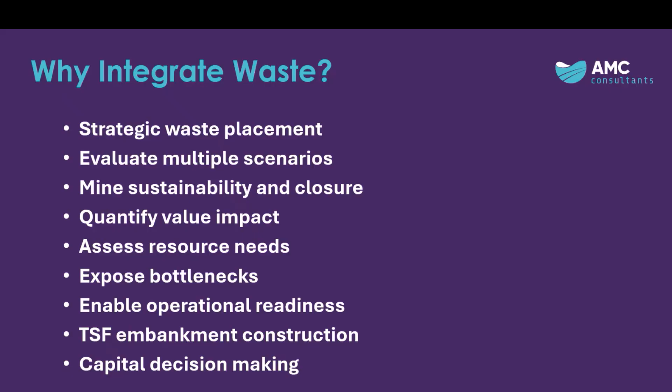Couple of terms I use: ARD, acid rock drainage; PAFs, potentially acid forming material; NAFs, non-acid forming material; and NAPP is the net acid production potential.

I'm not a geochemist, but we sort of utilize their information to integrate it. So it's important we sort of understand the terms that they're using, and we understand the data that they're providing us so we can integrate it.

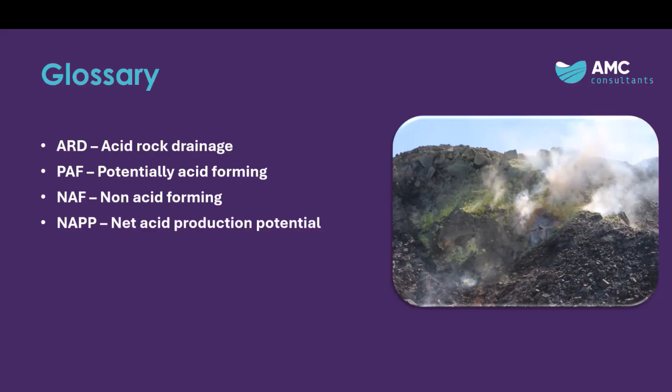So approaches. Like anything in mine planning, it depends. What level of study are you at - the concept? Are you at the DFS sort of stage? How much information do you have?

What's in your block model? Often you might not consider your waste dumps early in your mine life because you just don't have a lot of information. You haven't done your geochem, you haven't done your waste characterization, but you might have a bit of an inkling. You might have sulfur in your model, you might have a lithology model, or you might just be basing it on oxide and sulfides to get a rough idea.

Dump design complexity. Some operations need a very complex cover system for their waste dumps to encapsulate the nastier material, or it might be very simple. You might also be very early in your mine life. You don't really know what it is, but you understand you're probably going to need something to sit on top of it, or layer it, or create a base.

Does your site have stockpiling capacity? One operation we've worked with had zero stockpiling capacity for anything. So all the NAF that's needed needs to be mined as you're going over the operation. You can't just sit there and wait for later.

And modelling constraints. We talked a bit before about blending for grades, for throughputs. You can also apply your constraints to your waste dump, so that can be for the NAF we talked about before, or proportions of PAF and NAF as it's coming out by dump, by lift.

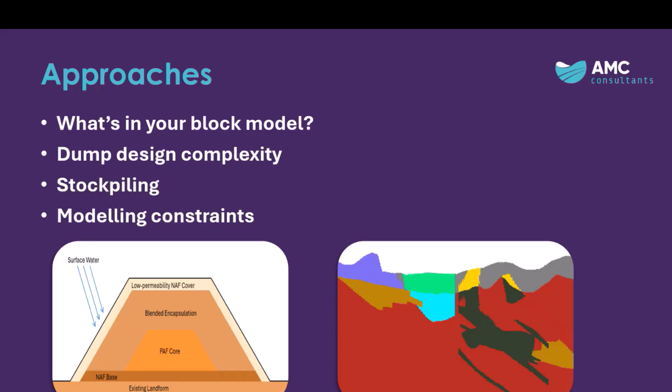So we'll just touch on a couple of case studies. The case studies go from more high level data to more detailed, sort of towards the end of your study period.

For this particular one here, just a very basic NAF-PAF definition based on the weathering profile - so oxide is NAF, the sulfides are PAF. We had a few different ex-pits, a few in-pits, so you can be trading off those. The ex-pits had a sort of concept cover system, and the in-pit was going to be a different method and didn't need any sort of ratio constraints.

There was a stockpile available. All these ones we have integrated haulage, so we can model the truck hours required and constrain that if we want to.

So the current ex-pit dump design involved a layer of NAF on top of each sort of lift, and then an outer face of NAF. We designed that up, some concepts using Studio OP, worked out some rough ratios and said, for this particular dump, we need 20% NAF. For this particular dump, we need 10% NAF.

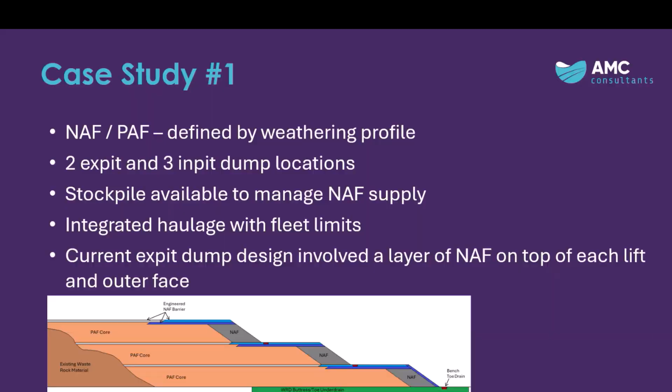So there's a whole bunch of modelling considerations. I suppose the primary one with Minemax is if you want to define your waste types differently, you need to bin them differently - you need to model them differently so it can allow different materials to go different places. You need to add some splits into your process flow to go to different dumps and manage for different materials.

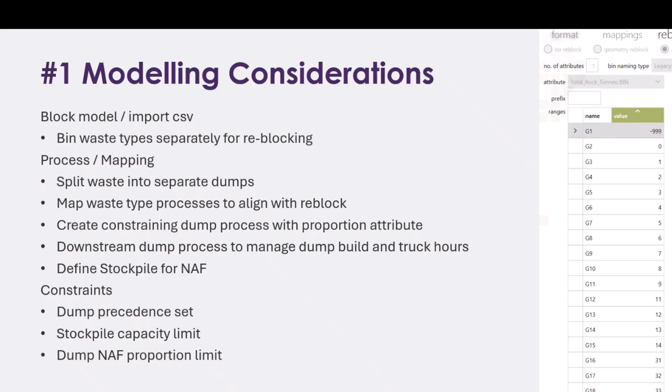So you set your constraints. We've got dump 1 and 2 with a NAF oxide percentage up there at 20%, and then 10% for dump 2, and then a stockpile limit of 8 million for the NAF oxide.

So we can see here early in the mine life, we're mining the oxide zone. We've got a lot of excess NAF, it's easy to achieve the proportions on the dump. But longer term, we're right on that limit, so the schedule is having to adjust how it's mining to hit that percentage of NAF required for that particular dump. And you can test by turning it off, turning it on, to understand what the value is.

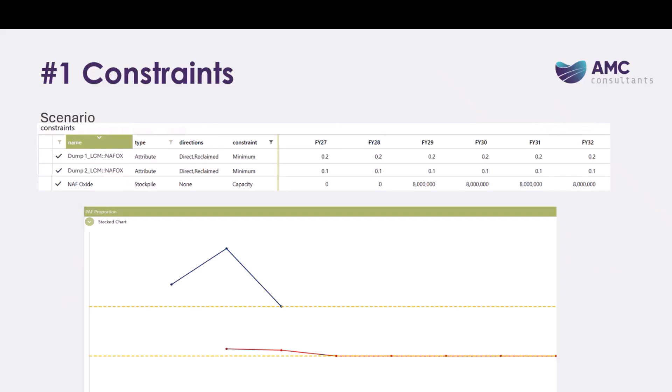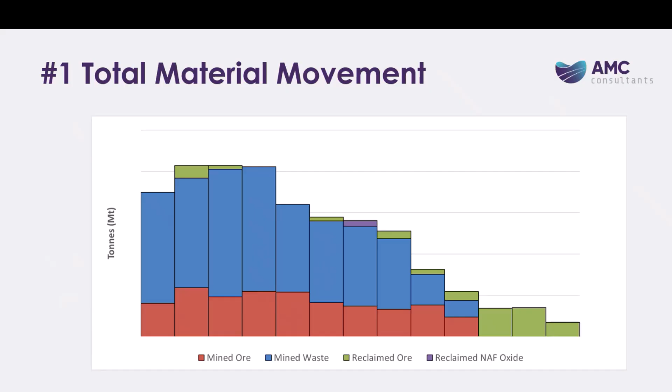To avoid any stockpiling costs or rehandle costs, with base mining you get your proportions of NAF and PAF as it comes out over the operation, over the life of mine. Again, equipment hours show you what impact it's having on your trucks and excavators, making sure that all looks good.

So that was a basic one, rough proportions on a dump with a landform set up, just to understand at a higher level what your NAF PAF issues are going to be long term and the impact on the haulage fleet.

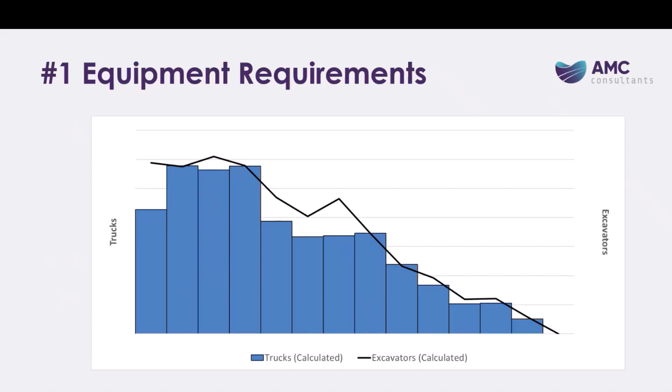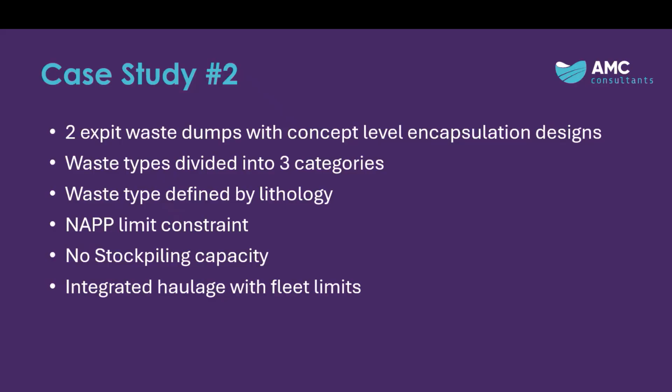Case 2 has a bit more level of detail. It's a couple of ex-pit dumps with concept level encapsulation designs. Waste types are divided into 3 categories in the model, defined by lithology. We've got a NAPP limit now on the global dump, managing how much potential acid it can generate. There's no stockpiling capacity, but we've still got the integrated haulage.

So Joe touched on before, having the right level of detail and the right level of plan. There's no use having everything in the plan if it's just going to slow it down and not really change your decision. This is an example where they had some concept level designs with PAF cells or outer encapsulation, but really what it came down to was just proportions.

The dumps are getting built with multiple lifts a year, so you can just look at what the percentages of materials are. We simplified it so the bottom lifts are just good limestone with good geochem and good geotechnical capabilities. As you go up the dump, you can start to put more of your deleterious materials, which maybe aren't as good geotechnically, so you can change those proportions.

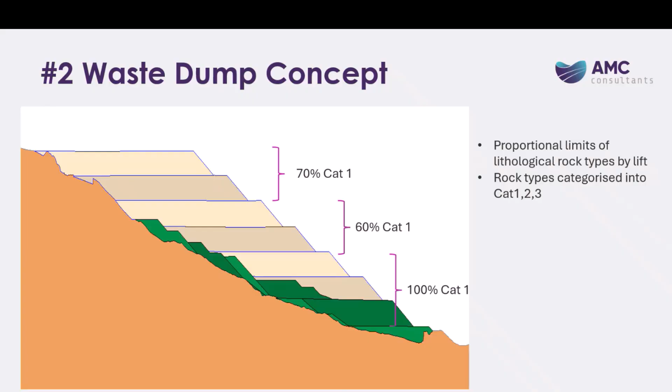To do this, we needed to bring the dumps in lift by lift as separate stages. So the decision tree starts getting quite big, but it gives you that control over each lift.

Modelling considerations are very similar to before. You need to make sure you've binned up the material appropriately, start splitting your waste streams into different dumps and lifts, creating some constraints, whether it's for proportion of materials or the NAPP, which you can blend for, and some downstream processes to build and set up your truck hours.

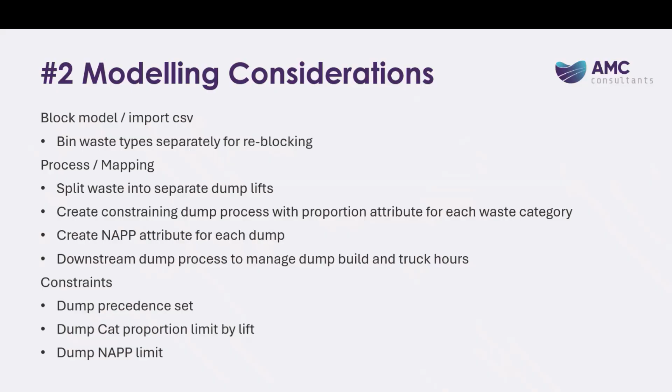So for this one, the constraints are: dump precedences are bottom up, dump category proportion limit by lift, and a NAPP limit. So here's the decision tree.

It's starting to grow a little bit, but we've got all the separate dumps - dump 1 and dump 2 - and then all the separate stages, so we can assign attributes here. So Cat 2, Cat 3, or NAPP on the global, as well as all the truck hours underneath.

Apologies for this table, but what it's trying to highlight is you've got your attribute constraint, and then you've got your actual. The highlighted yellow is what you've actually hit, and the other one is what the limit was. So we can see here, as we're starting to construct the dump, basically nothing but limestone can go to this dump, and it can hit it.

There's a few little sub-stages, so that's why it jumps around a bit. Then we get to, alright, you can send 40% of non-limestone material, and you can see sometimes it's 0, sometimes it's 2. But you can see this as it's scheduling - you can see the constraints it's adhering to, and the impact it's having on the schedule.

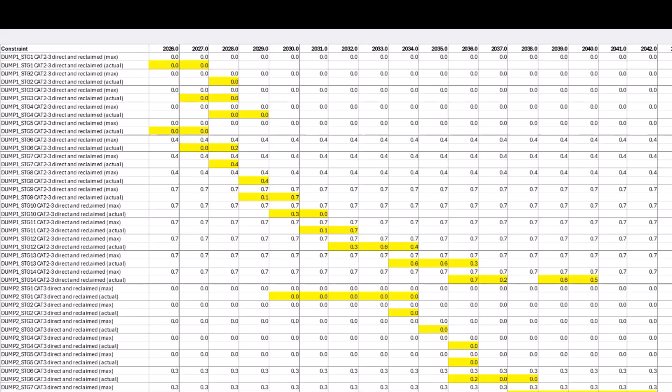Global NAPP constraints - we had a couple of other dumps here, but you can see it's bouncing around underneath the limit that we've set, and you can see how constraining these particular limits are.

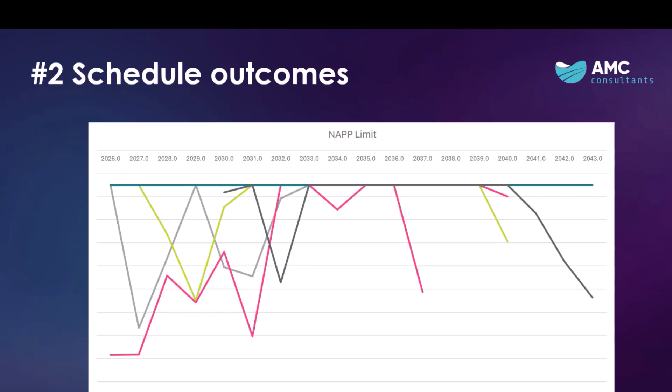But it's all integrated, so we can go forward with the strategic plan, confidently hand it over to the site planning team to say, look, here's the strategy, and then they've got half a chance of meeting these constraints in their tactical schedule.

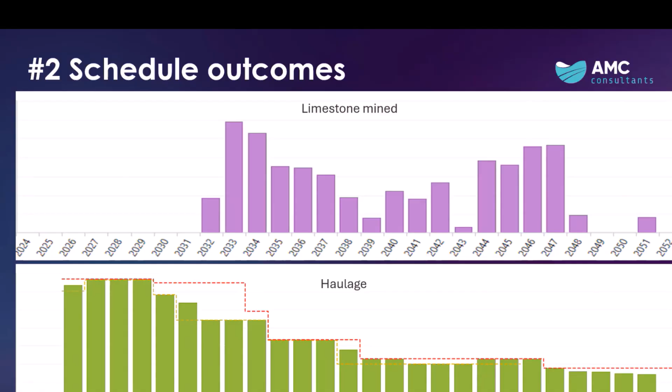All right, and finally, case study 3, a very mature operation with lots of geochemical data. The rock constraint, the rock characteristics are well defined. They're in the block model.

And they also had a stockpile. So the trick with this one was to bring in that waste dump, assign the materials to certain sectors, and then have all the constraints. So the dump is actually built in a way that you're not building over any air, basically.

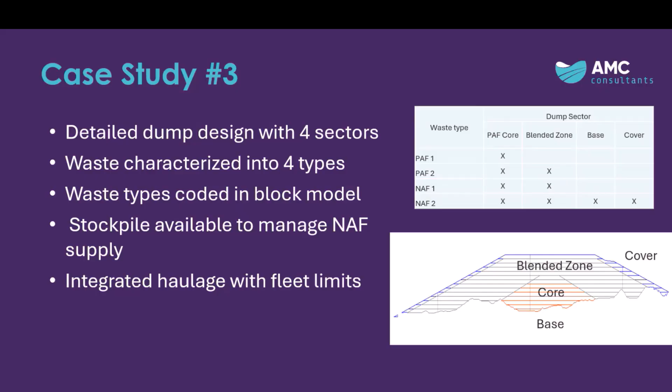So less on the attributes, this one. It's more on the physical and spatial limitations. So modelling constraints, again, you've got to separate your waste types for the reblocking. Split your waste into separate materials in the process mapping.

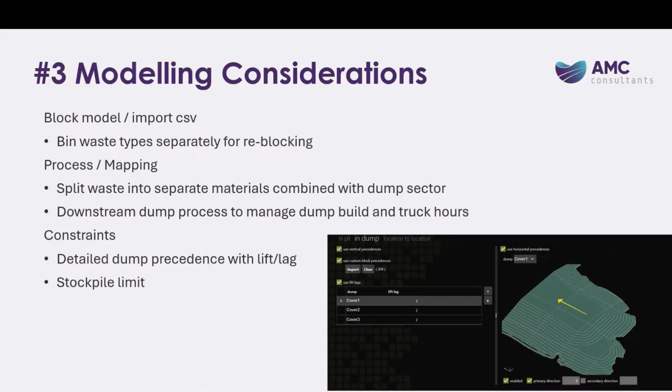Still got the downstream dumps to manage the builds. And then on the constraints, a bit more level of detail in how you might build your dump directions and then the precedences around that.

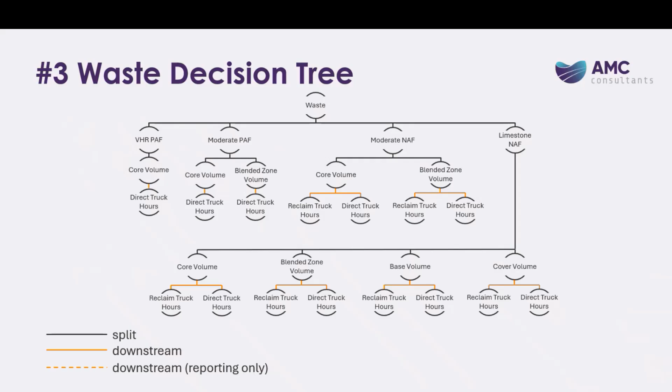Waste decision tree, so a little bit of a change. It's more material driven with the separate dumps underneath that. You'll notice the limestone NAF can basically go to any of the sectors, and then the other materials are more limited to what sectors they can go to.

For the dump, for something like this, we've got the overall cover, and it's by the design, and we've dissected it by lift, but we'll also dissect it into panels just to give a bit more flexibility for the haulage for short and long haul, as well as a bit more flexibility for how the dump's going to be built. And then we can use the lift lags to manage any location to location precedences.

So this is bolted onto the mining schedule with all the processing, so we can start to understand the impact on the operation if we need to put the dump into some sort of a waste dump like this.

So as it's scheduling, we're constructing the base. The next year we've got a bit of a blended zone. The PAF core gets hammered, so it gets built really quickly. On the southern side, we had some restrictions on clearing and some infrastructure that needed to be moved, so you can put a constraint on that, so you can avoid that for a couple of years.

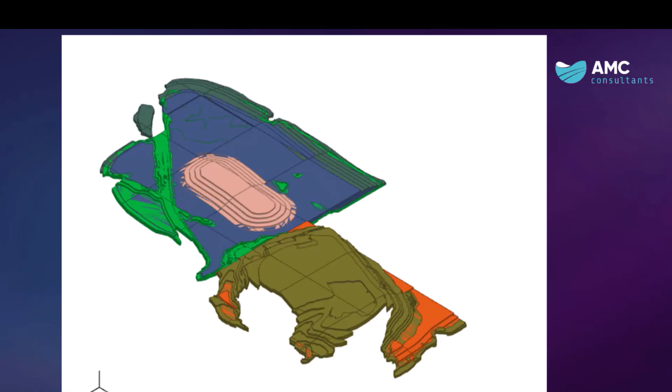Continue building the dump, and you can see the outer cover system coming up over the top of the blended zone. And then we finish the northern side, and we can start filling in the southern side. So that's the visualizer tied to the schedule. You also see the pit being mined, but it's just a nice visual tool to see how it all comes together.

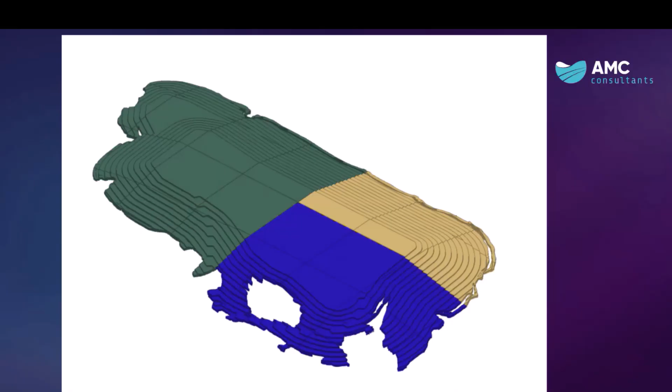Now, still on an annual schedule, there's some detail to be worked out for the site planners, but at least at a high level, strategic planning level, you've got a schedule that can deliver the materials at the right time. You can understand the impact on the trucks. You can see where the different materials are going to go.

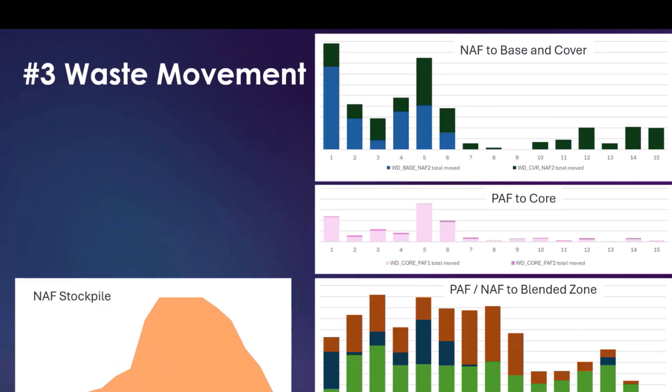And for this one, we needed quite a large NAF stockpile. So that then triggers, all right, where's it going to go? Do we need extra clearing? Do we need extra permits? You can start asking those questions from day one rather than trying to react to it later in the mine life.

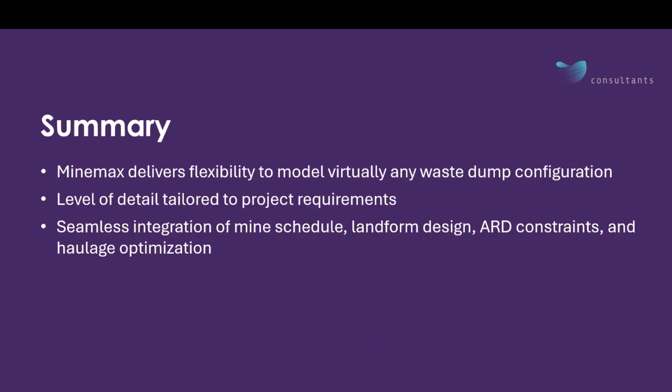So as you've seen, Minemax gives you the flexibility to model virtually any waste dump configuration with a level of detail tailored to your project needs. It's not just about design, it's about integrating landform, ARD constraints and haulage seamlessly into one plan. So why wait for problems to arise later when you can deal with them now and avoid that hassle? So thanks for your time.